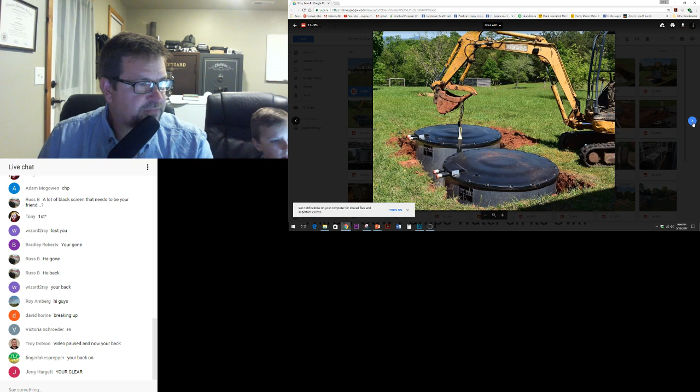My buddy Brian set the tanks in, buried the CalMac tanks for the thermal storage part of the project. Got those set, you can see them as we're going through here. Hopefully you can see them. And then they started gluing and burying pipes. All this was 1.25 inch PVC. Again, we're switching from refrigerant to water. Water is the gold standard for moving heat.

Yes, what do we got? Which solar company is best for where I am, getting a job? There are so many solar companies. We think Gain Solar is the best. West Coast Sustainable is a pretty good company. And Practical Preppers is starting to hold its own when it comes to solar installations, both small and big.

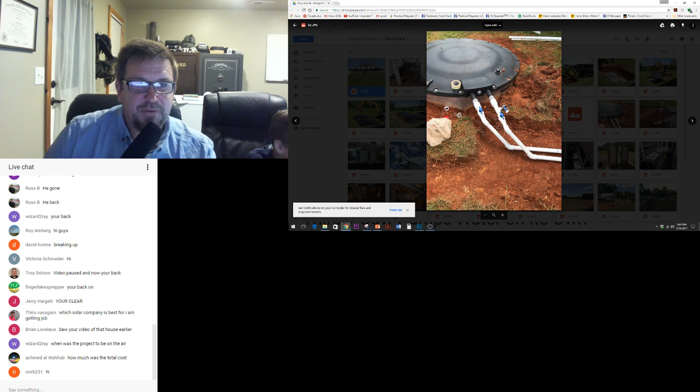So anyway, I'm back, I don't know why it delays so bad. So here we're starting to hook up these CalMac tanks, and let's take you through a few more slides.

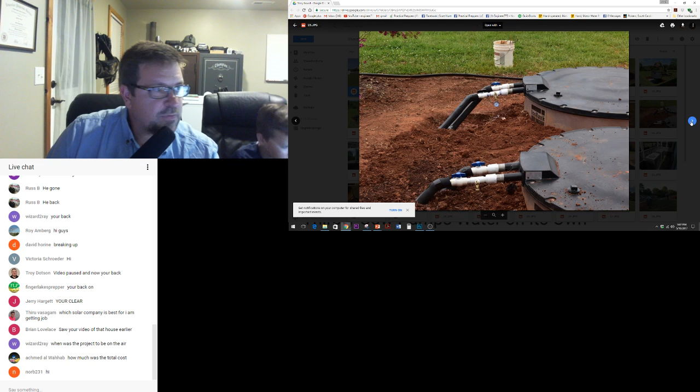Here are the chillers. These are the simultaneous hot and cold chillers from Multi-Aqua, and our local crane company, we've used these folks to do a lot of our crazy projects. And here we go, we're lifting a chiller up above and over the house, and we're going to lift it completely down into this area that has been stripped of all the heating and air equipment.

And now we're setting the 2 chillers in place. And here's the other chiller set in place, and now the air handlers. All the air handlers were replaced with 4-pipe air handlers. Here's under the house, I know I'm going fast. How are we doing with comments?

How much was the total cost? You know, this project's not done, let me tell you, it's an experiment. It is an R&D project, and so a lot of cost. There's 40,000 watts of solar, 4 Pika Energy inverters, chillers, tons of stuff.

Hello, Craig. Hello, Mr. Rain. I'm just saying hello to a few people.

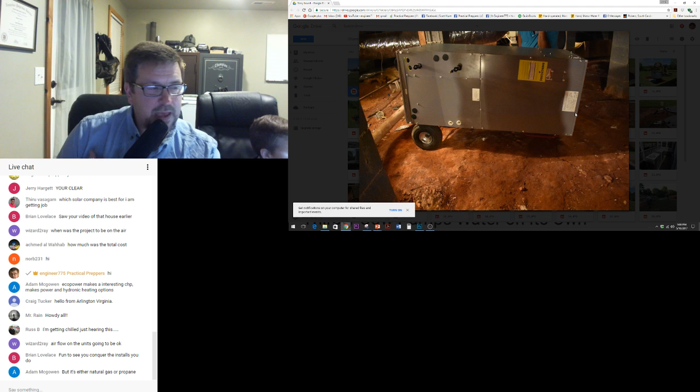EcoPower makes an interesting CHP. Yes, there is, EcoPower does. Getting to the chilled total cost, I can only guess, I'm gonna say 150K right now, but don't hold that against me. This is a learning experience. This is gonna apply to a lot of homes. Hydronics is coming, folks. Getting the refrigerant out of the homes, being able to do this, and not only do it in an efficient manner with water, but to be able to power this equipment with solar, with batteries, with wind, with generators. So we're going to keep going.

So this is under the house, replacing the air handlers. See, nice new air handlers going in, 4-pipe air handlers. And this is our trenching, we love to tear things up. So we're putting in the pipes. This is bringing the power from the solar. So this was the largest Schletter ground mount that I have built. It's 120 foot long, it has 72 solar panels on it, and that's just half of it.

And here we go, we got concrete set in the post. You've seen some of this. There we are, there's my buddy Abraham and I, we pretty much built the whole array.

This is good, honest, hard work doing solar, plumbing, hydronics, air conditioning. Everybody worked really hard, and we beat the deadline. Fun to see you conquer the installs you do. It is huge, absolutely huge, and it's only half of it. Here's me trying to smile and have a good time.

We're thankful that the sun went behind the trees so we could actually put some panels up. It was hot. Here's the tanks, here's the solar. There's a good shot, 72 solar panels. That's our southeast facing array, and we'll be putting up a southwest facing array soon, within the next 2 weeks.

Will you be using storage tanks with the cryo balls? No, let me go back to this. You can look up these tanks from CalMac. These are ice banks, there are PEX cassettes in these, and there's propylene glycol, about a 30% mixture, that pumps through these tanks. As it pumps through, the set point is down around 20 degrees Fahrenheit, which causes the tank to actually freeze. We're still experimenting with that.

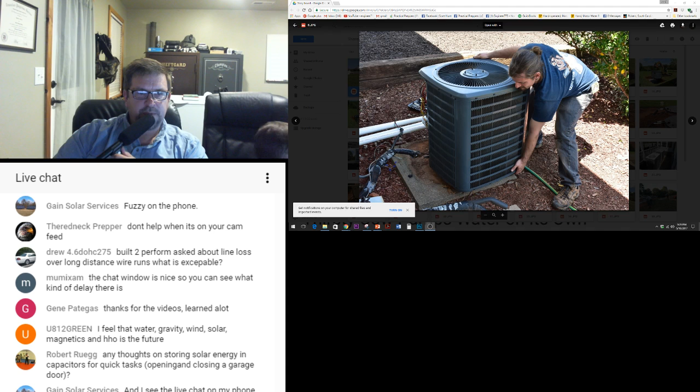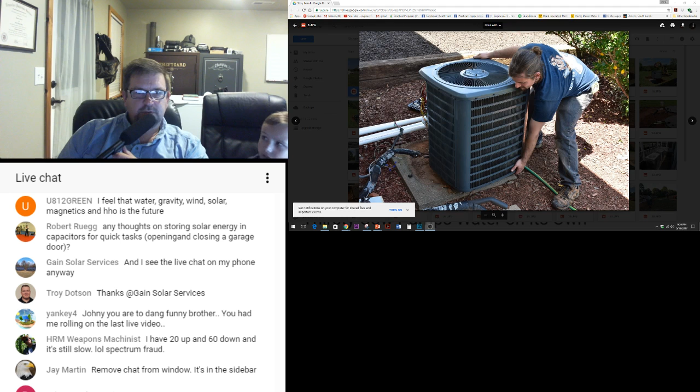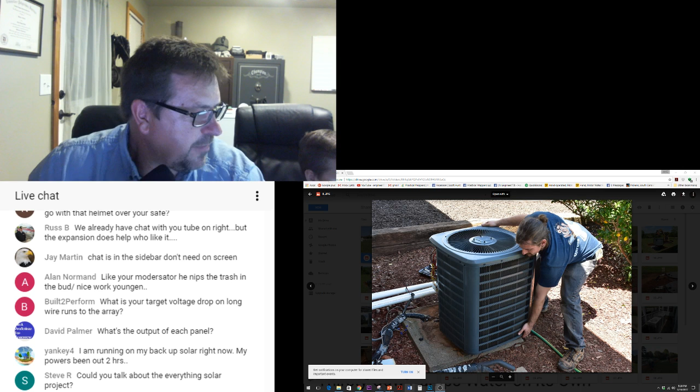Hey, where's our Google Drive files? Can you mix solar panels the sizes I have? Yes, you can, but you shouldn't. Mixing solar panel size. Where'd my Google Drive go?

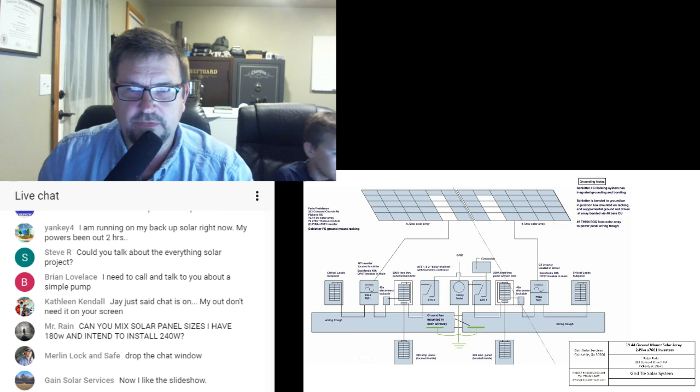If you're curious about our design, this is the design that we put together for this. Things are cracking down here. A lot of people are doing solar in South Carolina, so we're having to get our drawings stamped.

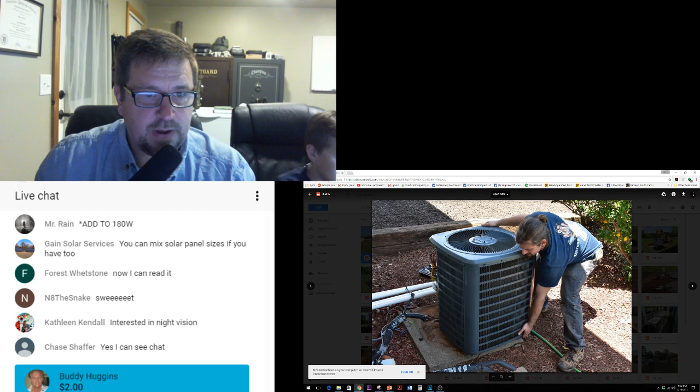Interested in night vision? Okay, cool. Yeah, I used night vision to do a job the other day.

Hey, Buddy Huggins, you paying attention? He gave us $2. Hey, Buddy, you got any questions? I talked to Buddy a couple weeks ago.

The night vision, yes, the PVS 14, 15s are still available. I got a buddy in Southeast Georgia that sells them, JRH Enterprises. I think Robert Griswold at Ready Made Resources is also another source.

I actually had to go to a site in Georgia, and I was really late because Johnny just took all my time that day - just kidding. And I did a site survey at night. That's why I was trying to find those pictures.

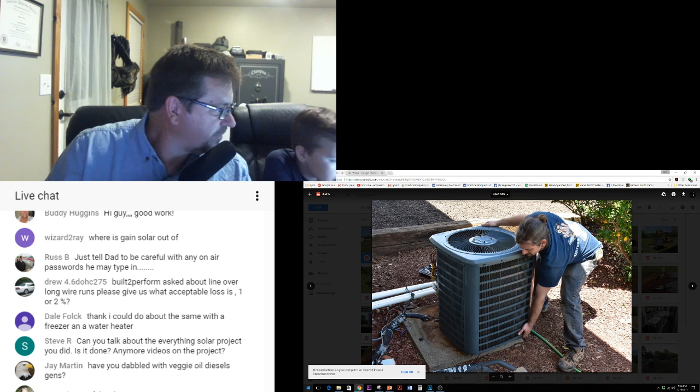That's my buddy from West Coast. Talked to Jason today about the VSP.

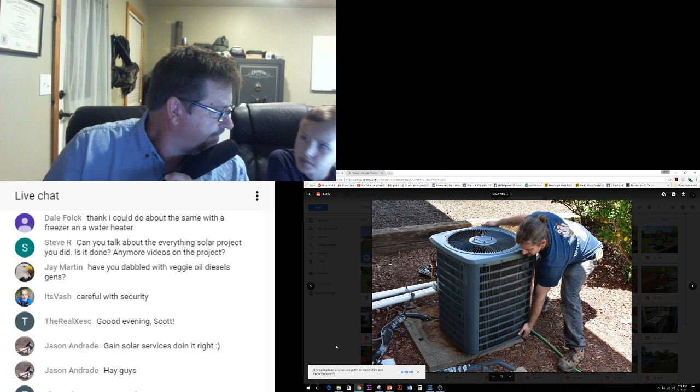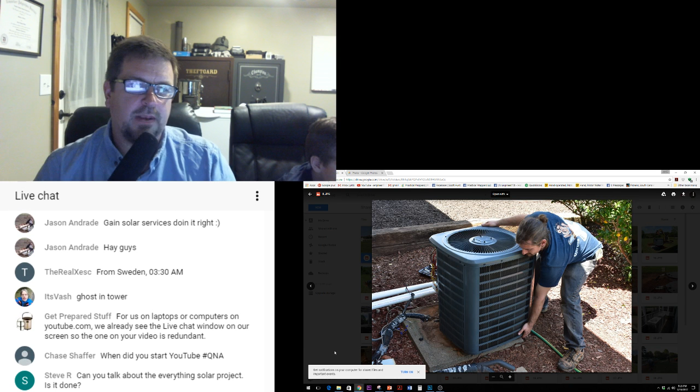Really started seeing the benefit of using YouTube not only as just a fun outlet for what I do, but a way to reach around the world, share everything. I've learned so much from my subscribers telling me, hey did you see this, hey check out this, you're doing this wrong, you're so stupid. Anyway, and then taking a lot of flack and people challenging me on every subject that I put up, and that's cool.

I'm here to learn. People saying you're not an engineer, you're a loser, whatever - Eli, give me my diploma, I'll put that out there for proof.

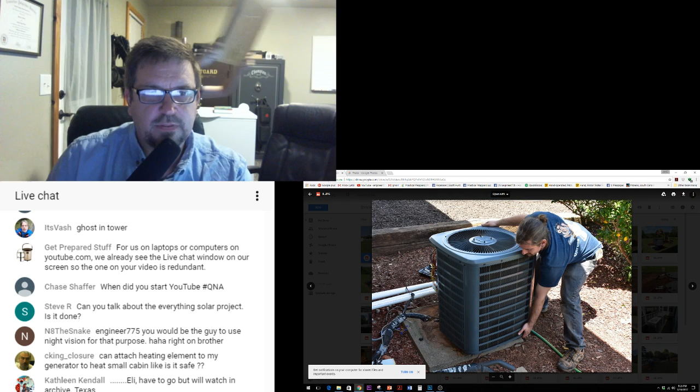So can you talk about the Everything Solar project? Is it done? No, it's not done. What do you got here?

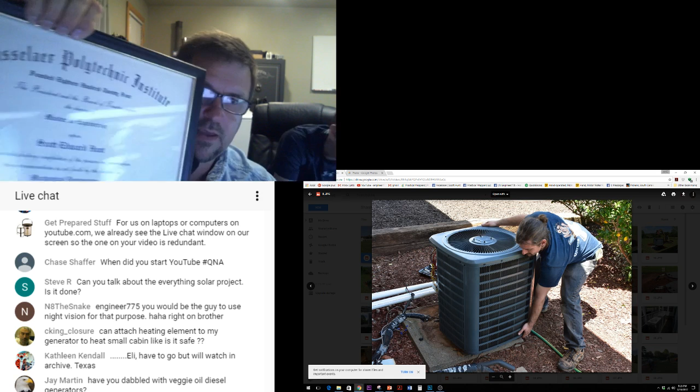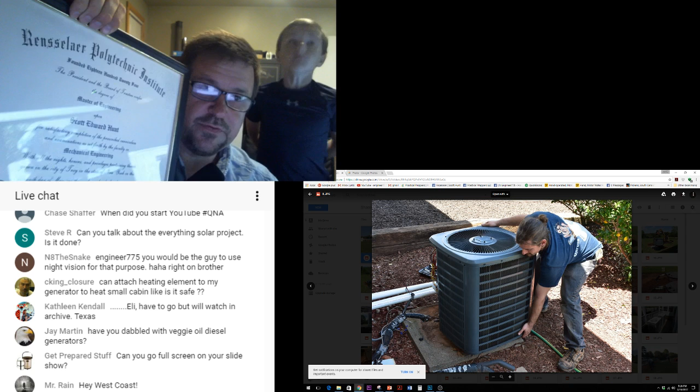Just so a lot of people don't believe that I'm an engineer and I just made up a channel, I'm going to brag on RPI. This is where I went to school, Rensselaer Polytechnic Institute. I have a master's degree in mechanical engineering, and I was very thankful for the privilege to go there. It's the oldest engineering school in the United States, founded in 1824. At first it was an ag school, then it turned into one of the top 10 engineering schools in the graduate program in the country.

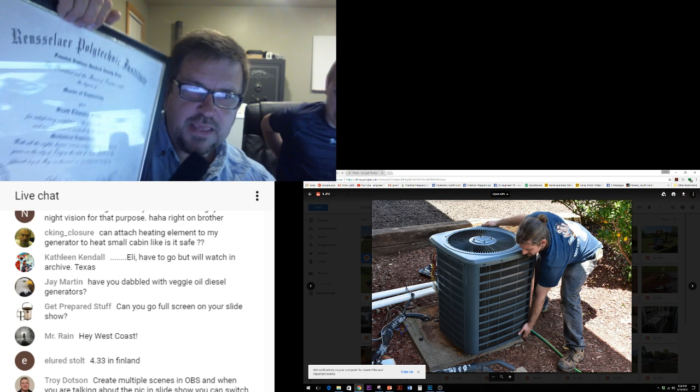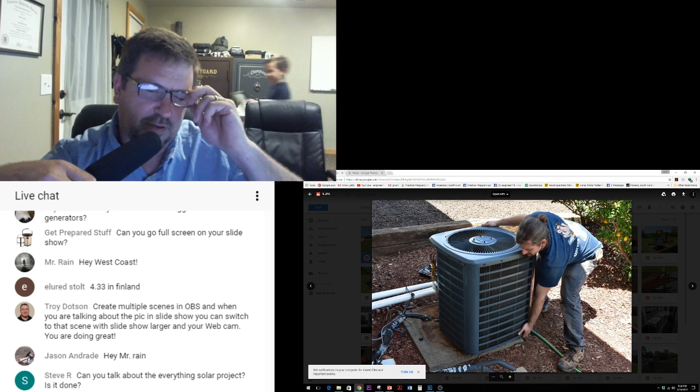Says it's fake. What's fake? That this is fake, my diploma? Yeah, I got this in a Cracker Jack box. I made this up on Photoshop. So anyway, put that back. If you show them, they still don't believe. Yeah, I graduated a long time ago, in 1992, and so I do have an engineering degree. Not that that means anything much.

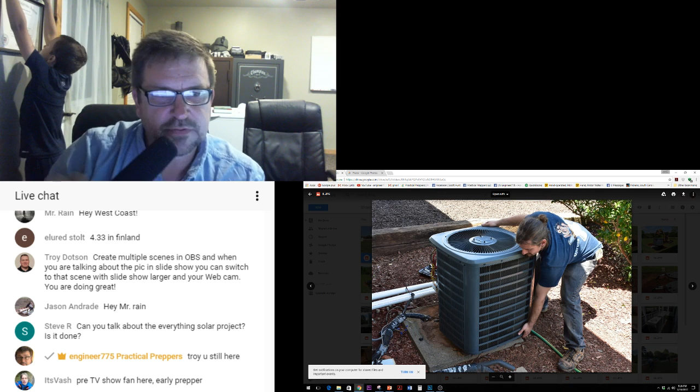Full webcam. Oh my goodness. Goodbye, that's not good.

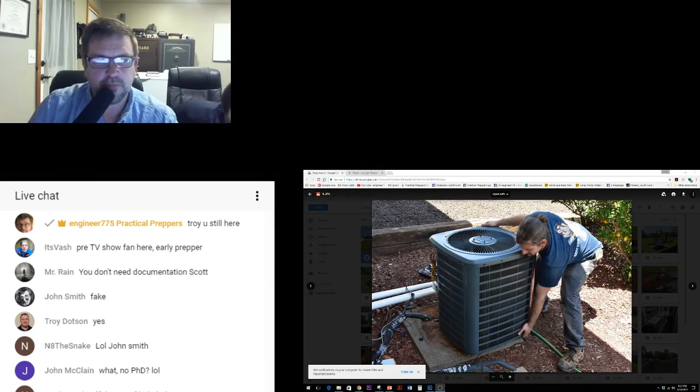On the camera, your mouth just showed up in the corner. It was like you're talking, and then it just went back. Oh my goodness!

All right, wow, there's the YouTube. I'm buffering again. What, Rookie LOL. Is that from Chase? Hide live chat. No, that's from Doug Ford. Rookie.

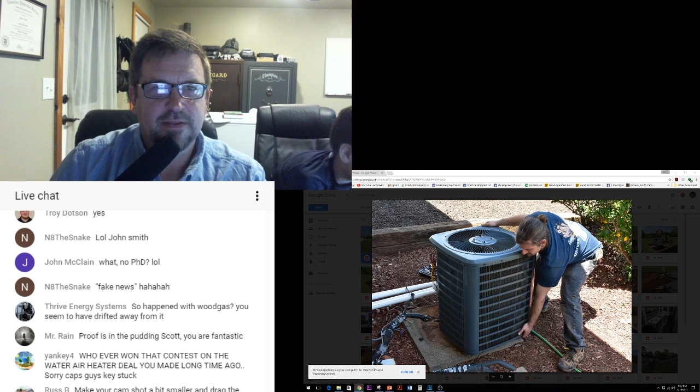We're rednecks, we need some cool photos. There's Johnny working hard, ultimate. Just a lot of work, just a lot of ripping and tearing. There's a good ripping and tearing picture.

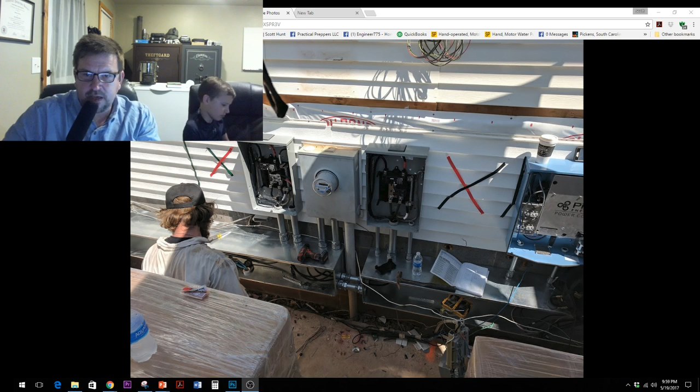It is the bus, it is the connection for the DC power. You could bring a wind turbine into it. Oh, you're not even seeing it because stream for some reason. It's okay, Elijah, it's just been doing it over and over. I don't know if you can see this. I'm going to go ahead and enlarge this. I'm going to shrink me down here. Here's the inside of the Pika 7601 inverter, and over to the left here is the Rebus connections. There's two 30 amp breakers, two 20 amp breakers, and that's all the DC.

What's he saying? The real question is, who's Rebus? It's Uncle Rebus to you, Johnny Valentine.

So the DC comes in here is connected to the Rebus. I don't know if that answered the questions, but that is a proprietary DC nanogrid invented by Ben Polito and Joshua Kaufman. Those were two gentlemen. They went to MIT together, and they founded Pika Energy in Westbrook, Maine. Had the privilege to go up to Maine and meet those guys and their team, and some of their guys have come down here to work with us, to support us, and we hope to be one of their biggest installer customer bases here in the South.

So back to that, any other questions about Rebus? Can the Pika feed DC batteries from the grid through a Pika? Yes, the Pika has a bidirectional link, B-link. They have a PV link, they have a B link. These are the bidirectional optimizers and DC to DC converters that allow you to charge the battery off the grid, off of a generator, or off of solar, and everything hits the Rebus, the DC nanogrid bus bar, and allows this bidirectional flow of energy. I hope that made sense.

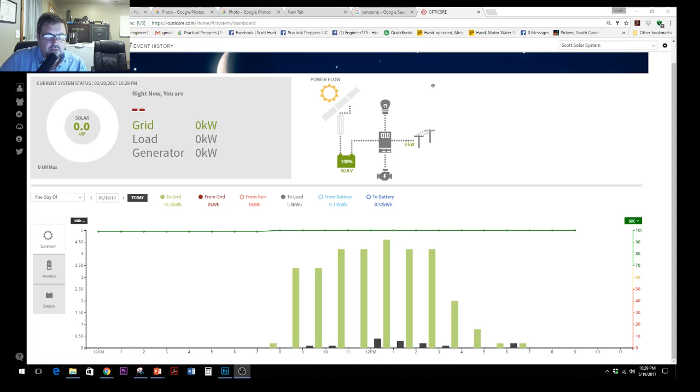So this is what my solar system did today, on the charge controllers, basically from my Radian. I have one Outback Radian inverter and 8 kW of solar, and on the charge controller it made about 42 kilowatts, 42,000 watts today. So it's great, you see the green versus the load, very low. I dumped all my power back on the grid today and got credit for it, so I love the solar. I hope that answered that question. I'll go back to this and back to the chat.

That'd be cool. Got any suggestions on a quiet wind turbine to augment my solar system with?

There's going to be a lot of arguments on this, but the only ones I have experience with for small turbines are the Primus Air, the Air 30, the Air 40, the Air X, and the Pika Energy. But with Pika you've got to be at 380 volts to deal with it. So there's a lot of options.

Yeah, spiraled out 42 kilowatts solid. It was wonderful. And I've expanded, I put in 2 more 2-inch conduits so I could triple my system if I needed to. I'm looking forward to at least doubling it. I got an inverter from old Johnny Valentine that I need to rebuild and put a new power module in. Then I'll hopefully be up to 16 kW of Outback Radian and put up more solar.

So that's a ton of grid feeding. Yes, that's why I like having a net meter system. When power goes out, who cares? I can run, I can cruise off grid, but why waste the energy? From 9 to 3 I'm working somewhere on somebody's off-grid job or helping somebody, and I'm not using any power, so I'm sending it all back and getting credit for it. My battery is just in float. And we've had power outages, and it's a lot of fun to throw the switch and be able to — the way I've got mine set up, I can send the power anywhere on my property.